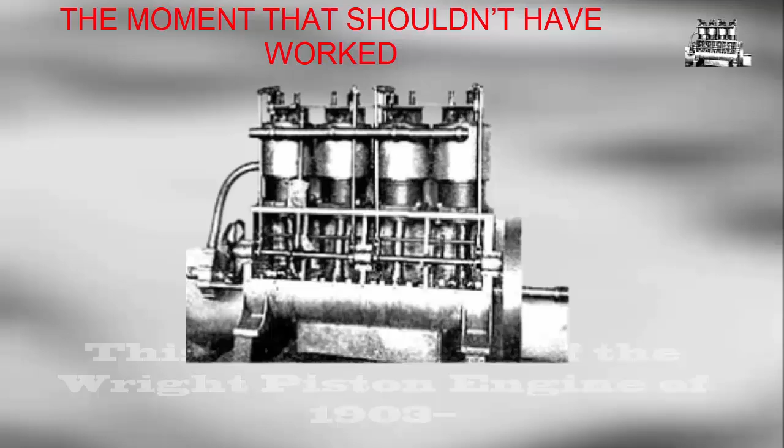This is not just the story of the Wright brothers. This is the untold truth behind the piston engine that made flight possible, the engine that proved power wasn't everything, and that control, efficiency, and understanding the air mattered more than brute force. This is the story of the Wright piston engine of 1903, the first heartbeat of human flight.

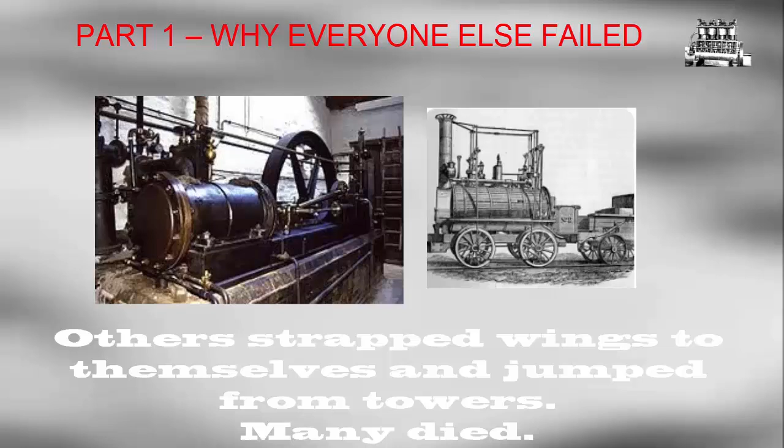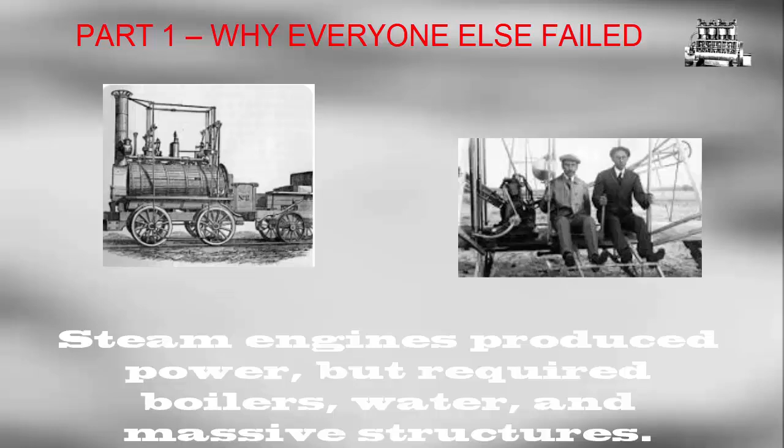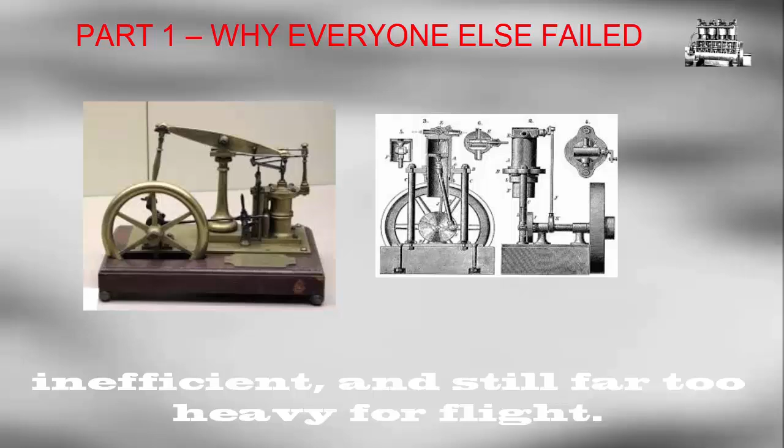By the late 19th century, humanity was obsessed with flying. Inventors across Europe and America had tried, and failed. Some built enormous steam-powered flying machines, others strapped wings to themselves and jumped from towers, and many died. The problem wasn't imagination. It was power-to-weight ratio. Engines of the era were heavy, too heavy. Steam engines produced power, but required boilers, water, and massive structures. Internal combustion engines existed, but they were unreliable, inefficient, and still far too heavy for flight.

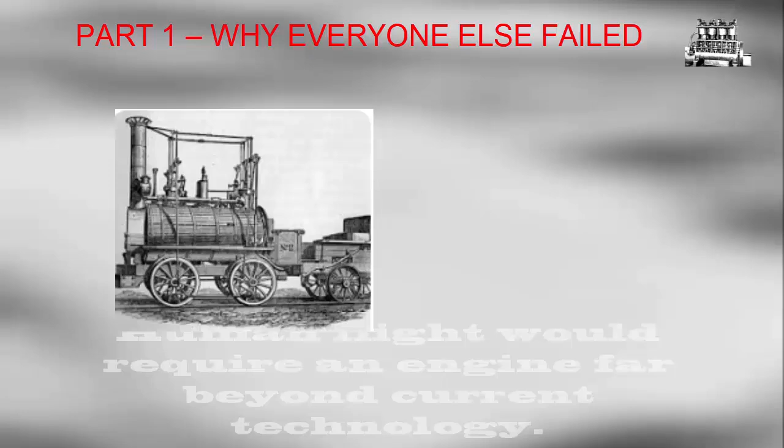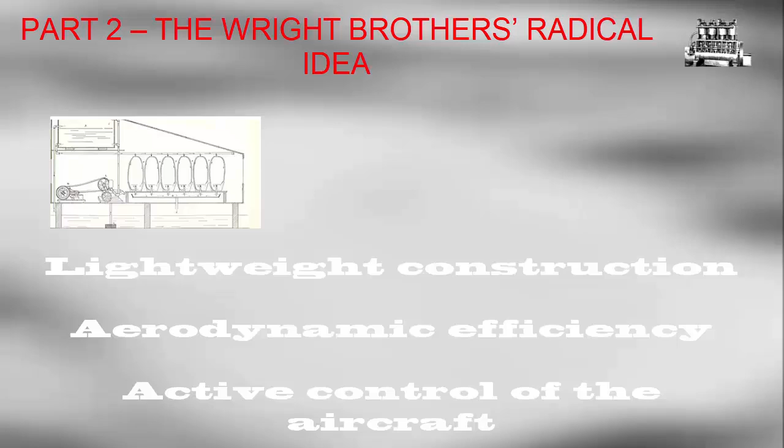Most experts agreed on one thing: human flight would require an engine far beyond current technology. That's where the Wright brothers disagreed. Wilbur and Orville Wright didn't ask, how do we build a more powerful engine? They asked something far more dangerous: what if we don't need much power at all? Instead of chasing horsepower, they focused on three principles: lightweight construction, aerodynamic efficiency, and active control of the aircraft. They believed that if drag could be reduced and lift controlled precisely, even a weak engine might be enough.

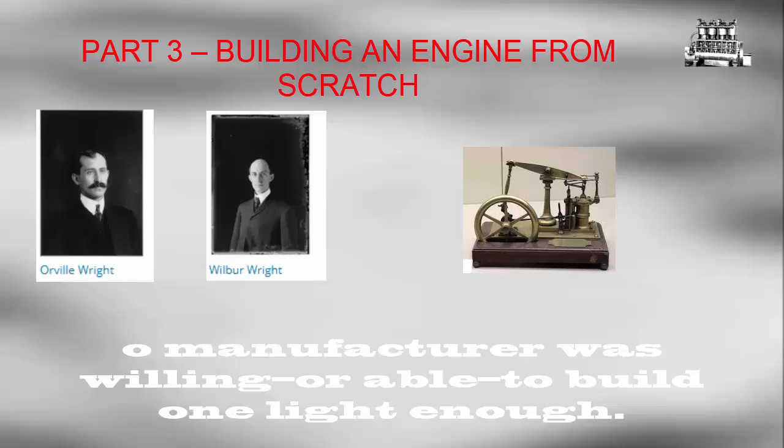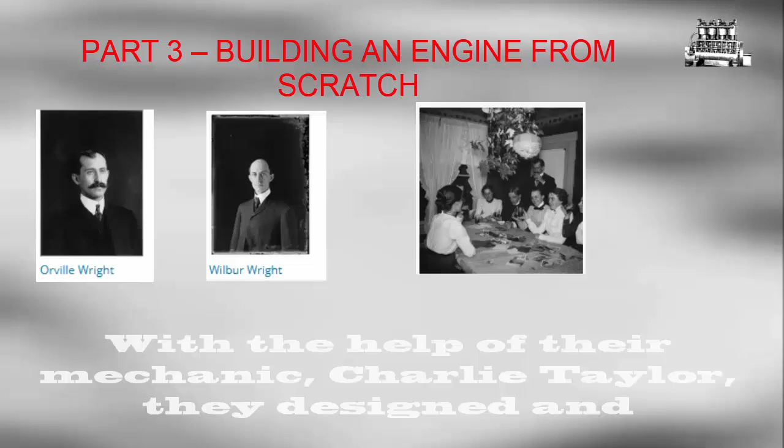That belief changed everything. Here's the shocking truth: the Wright brothers couldn't buy an engine. No manufacturer was willing, or able, to build one light enough. So they did the unthinkable. They built it themselves with the help of their mechanic, Charlie Taylor. They designed and assembled a four-cylinder, inline piston engine in their bicycle shop. It wasn't elegant, it wasn't polished, but it was revolutionary.

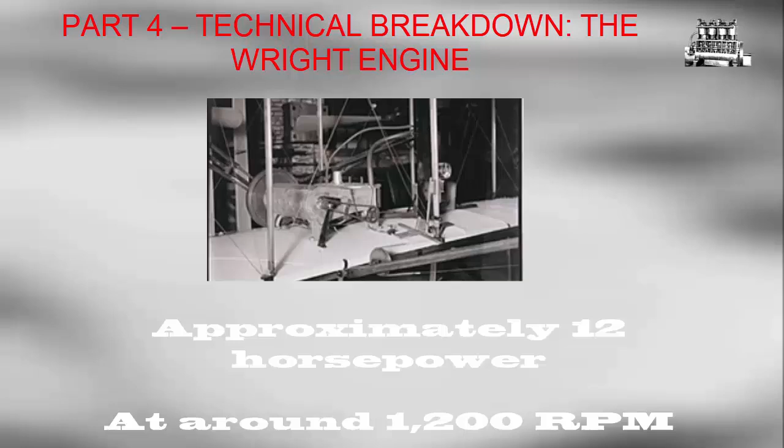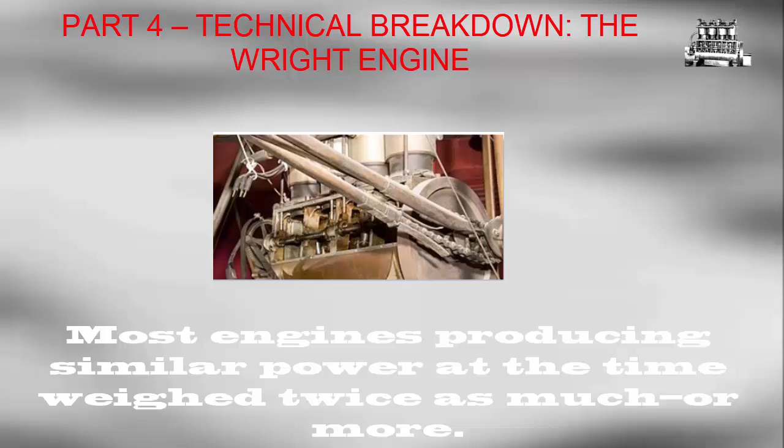Let's break down what made this engine special. Configuration: four cylinder, inline, water-cooled, horizontally mounted. Power output: approximately 12 horsepower at around 1,200 RPM. That number sounds laughable today, but here's what mattered: weight, 180 pounds, 82 kilograms. Most engines producing similar power at the time weighed twice as much, or more. The Wright engine achieved something rare for its era: a usable power-to-weight ratio.

One of the engine's most overlooked innovations was material selection. The engine block was cast from aluminum. In 1903, aluminum was expensive, difficult to work with, and rarely used in engines. Most manufacturers relied on cast iron. The Wrights rejected that entirely. Why? Because every extra pound meant failure. Using aluminum reduced weight dramatically, but introduced new risks: lower durability, heat management challenges, structural uncertainty. The Wrights accepted those risks because flight demanded it.

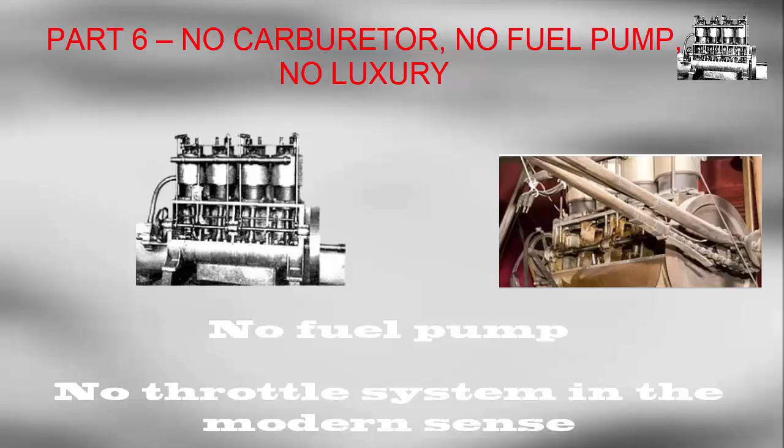This engine was brutally simple. There was no carburetor as we know it today, no fuel pump, no throttle system in the modern sense. Fuel was gravity-fed. Air-fuel mixing was crude. The engine wasn't designed for longevity. It was designed for just enough time in the air, and that was all it needed.

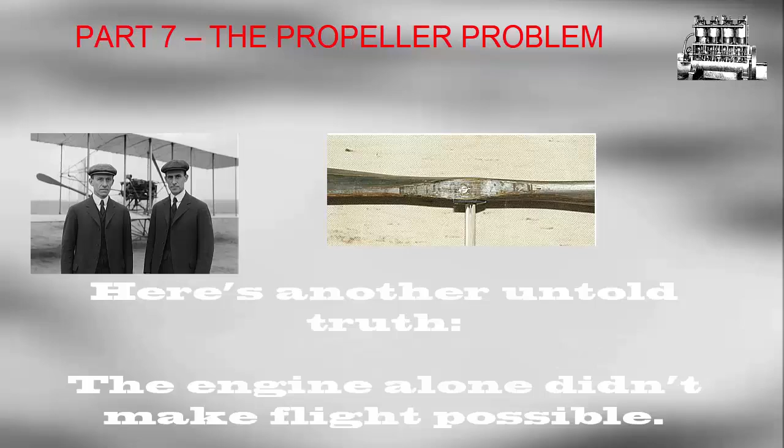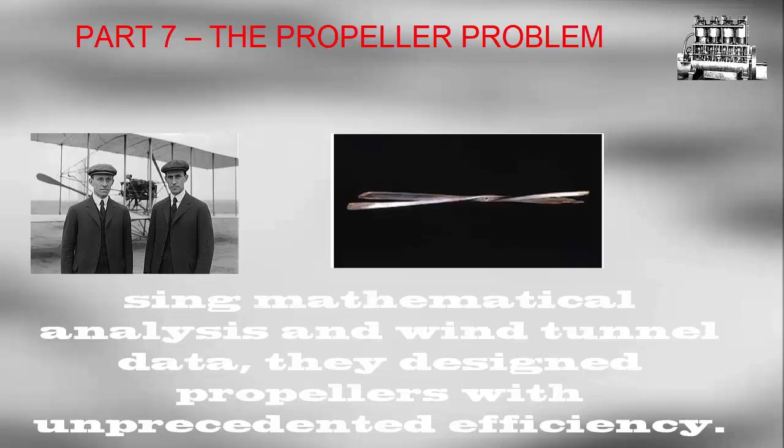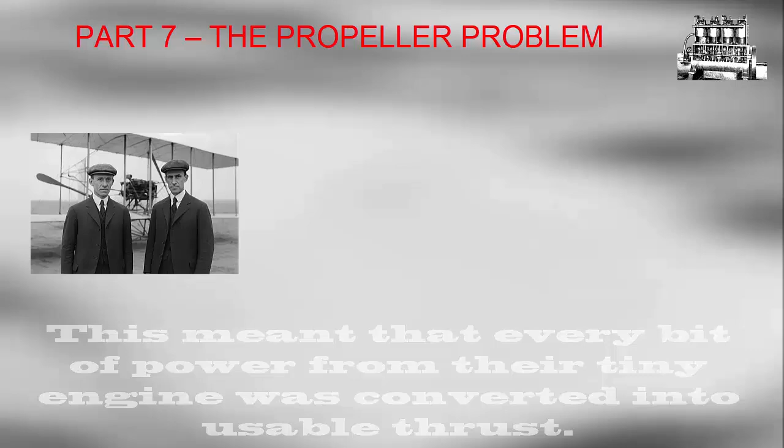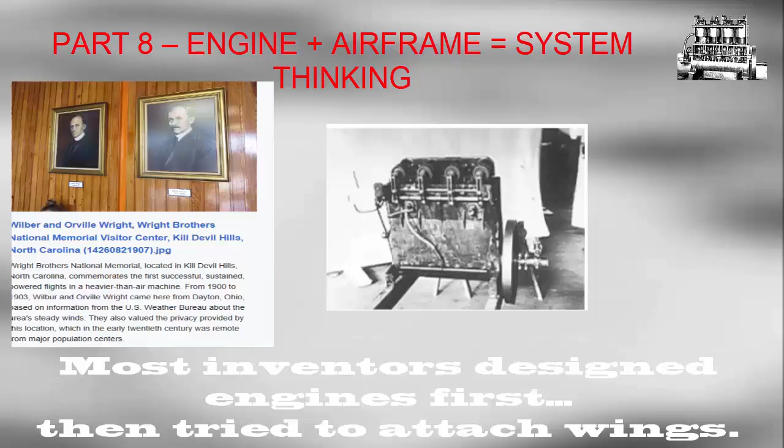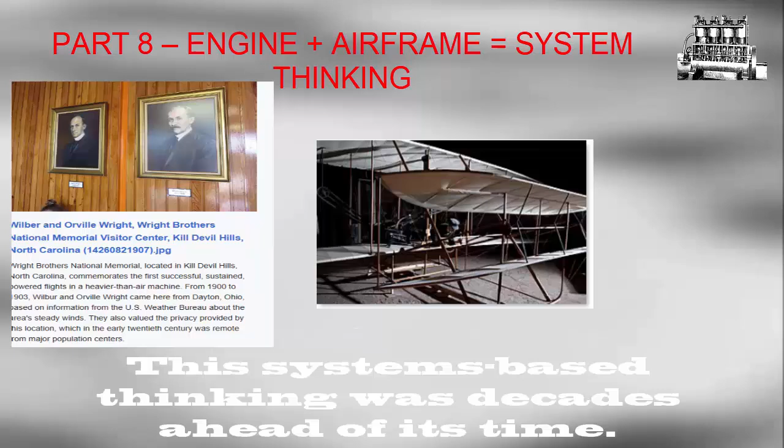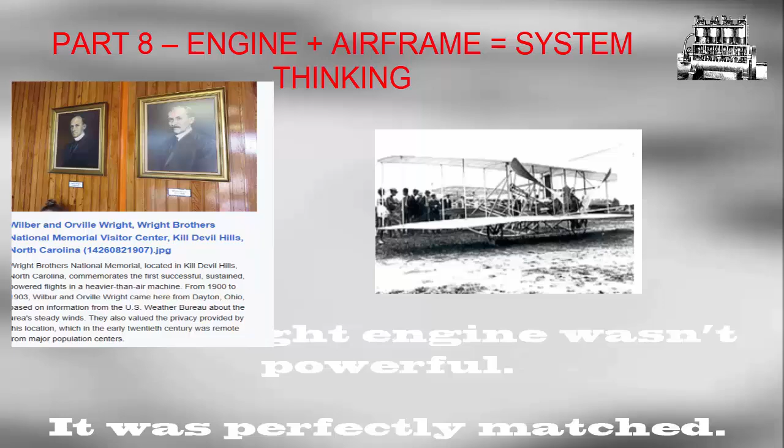Most inventors designed engines first, then tried to attach wings. The Wrights did the opposite. They designed the aircraft as a complete system: engine, propellers, wings, control surfaces, everything worked together. This systems-based thinking was decades ahead of its time. It is the same philosophy used today in Formula One engineering, aerospace design, elite motorsport. The Wright engine wasn't powerful. It was perfectly matched.

The moment arrives. Orville Wright lies flat on the lower wing of the Flyer. The engine roars to life, rough, loud, vibrating violently. No one knows if it will fail. No one knows if it will explode. The Flyer begins to move, and then it lifts for 12 seconds. It remains airborne, only 120 feet, but in that instant, everything changes. The age of controlled, powered flight begins.

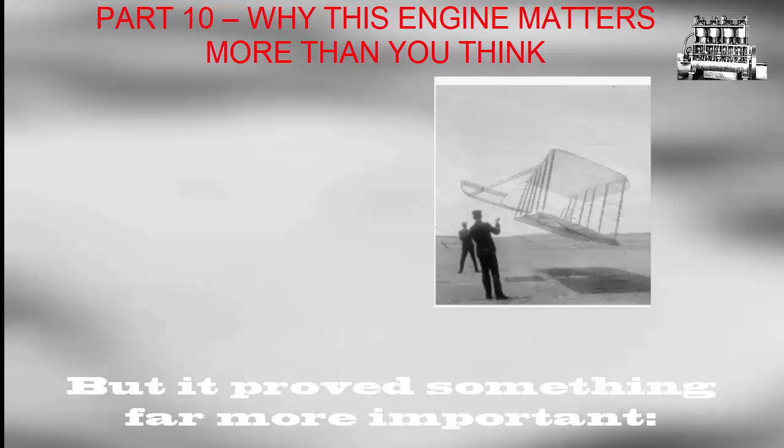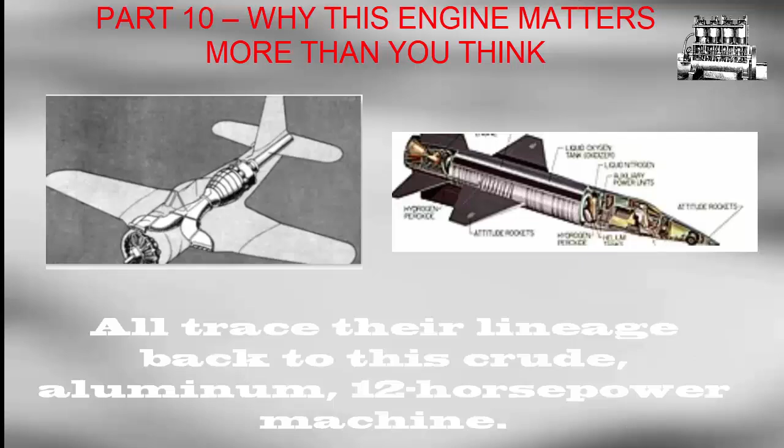The Wright piston engine didn't dominate the skies. It didn't win wars. It didn't break speed records, but it proved something far more important: human flight was possible with internal combustion. Every aviation engine that followed, from rotary engines in World War I, to Merlin engines in World War II, to modern turbofans, all trace their lineage back to this crude, aluminum, 12-horsepower machine. Within a decade, aviation exploded. Engines became more powerful, more reliable, more dangerous, but the core principle remained the same: lightweight, efficient, purpose-built. The Wright engine was the seed that World War I turned into a forest.

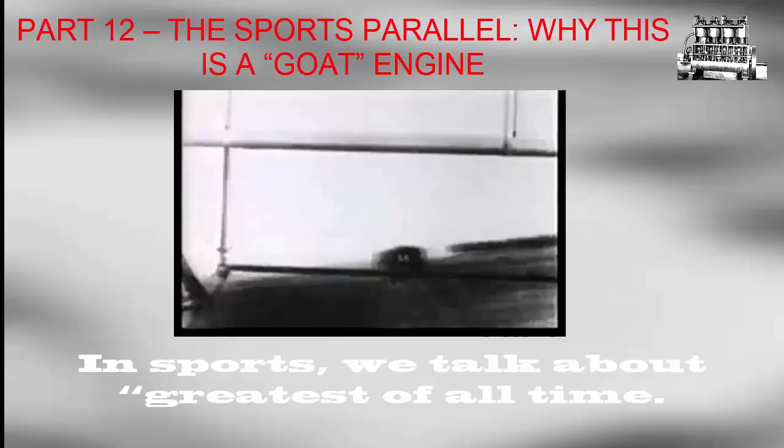In sports, we talk about greatest of all time. The Wright engine will never win on stats, but like a rookie who changes the game forever, it rewrote the rules. It wasn't the fastest, it wasn't the strongest, but it was the first that truly worked, and sometimes that matters more than everything else.

Today, jets cross oceans in hours, satellites orbit the Earth, spacecraft leave the planet entirely, and all of it began with two brothers, a bicycle shop, and a fragile piston engine that barely had enough power to fly. The Wright engine didn't just lift an airplane. It lifted human history, and that is the untold truth.